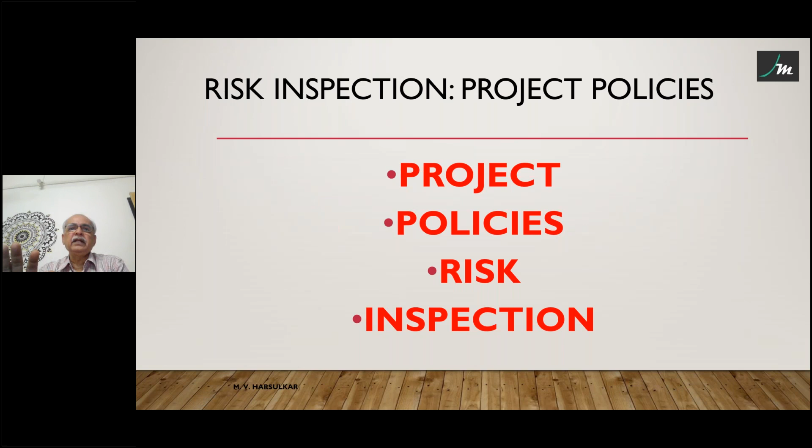So what is a project? We have to first understand what is a project. So normally what we understand by project as far as engineering insurance is concerned is whatever is under construction or erection. So it can be a civil work, it can be a machinery erection, it can be a combined civil and machinery erection, or it can be only a structural work like say transmission towers or mobile phone towers and all these things.

So in civil construction, you have different types of civil construction, residential buildings, commercial buildings, or airports, or infrastructure projects like harbors, railway lines, and airports. In machinery, it can be individual machinery like a DG set or compressor or boiler, or it can be a section of the main plant like coal handling plant, ash handling plant, water treatment plant, or the entire project, large projects like power plants, chemical plants, fertilizer plants. And structural work, it can be transmission line towers or mobile phone towers or windmills. So this is what we understand in project.

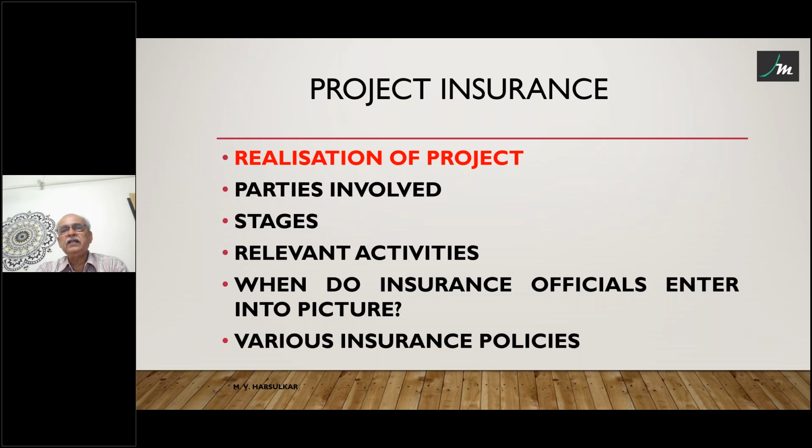Now let us first understand how the project is realized, who are the parties involved, what are the stages, relevant activities at each stage, when do insurance officials enter into the picture, and various insurance policies. As far as surveyors are concerned, we are concerned only after the insurance policy is issued. But if we understand this process, we will understand some of the issues we face when we go for survey and the policies have some lacunas. If you understand these stages, then you will understand why those things have come into picture in the policies. I will not go into much detail on this.

First is the objective, which is decided. Once the organization decides some objective, they do a feasibility study. In that, they will see how much market can be there, financial requirements, social, and all those things. After that feasibility study, if they decide to go for the particular project, erection or construction of a civil facility, at this stage the insurance agent or risk management consultant should come and advise them on proper insurance coverages during the project stage.

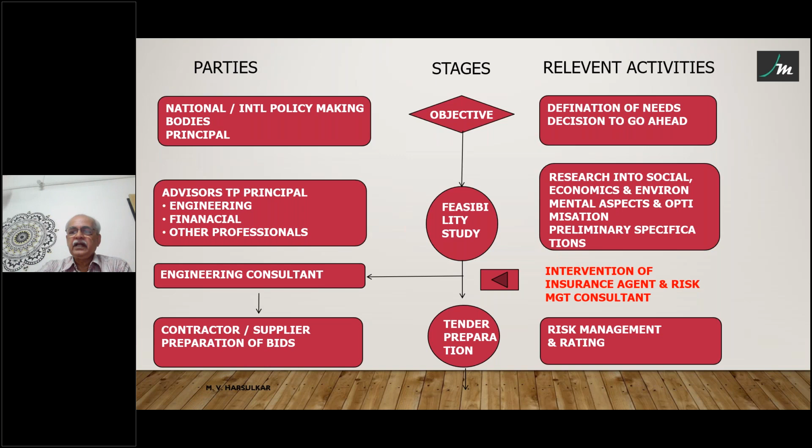Because in the tender, there is an insurance clause. If advice is given at this stage, that clause can be proper, and there will be no gaps in insurance. So once the tender is prepared, next will be the successful bid and work contract award. After that, the issuance of either a marine-cum-erection policy, or an erection all risk policy and marine policy separately, and other relevant policies for the project.

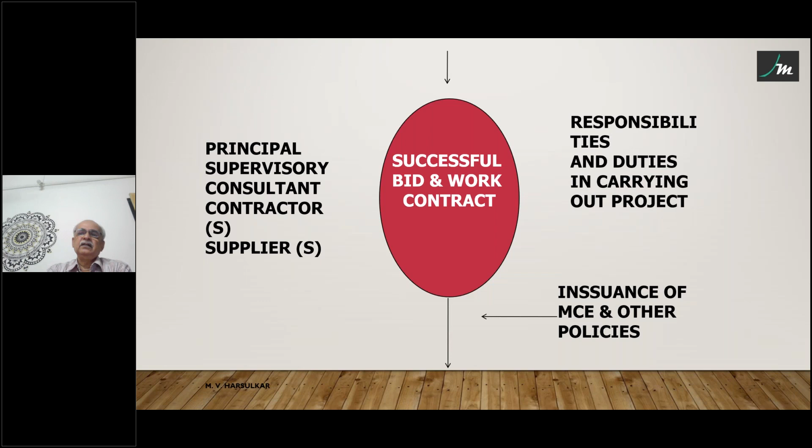And the project, actually now here our scope comes. Survey, you can get a survey at any of these stages. So generally, the first phase is site preparation, and simultaneously some material may be coming. So pre-erection or pre-construction storage of that material at the site.

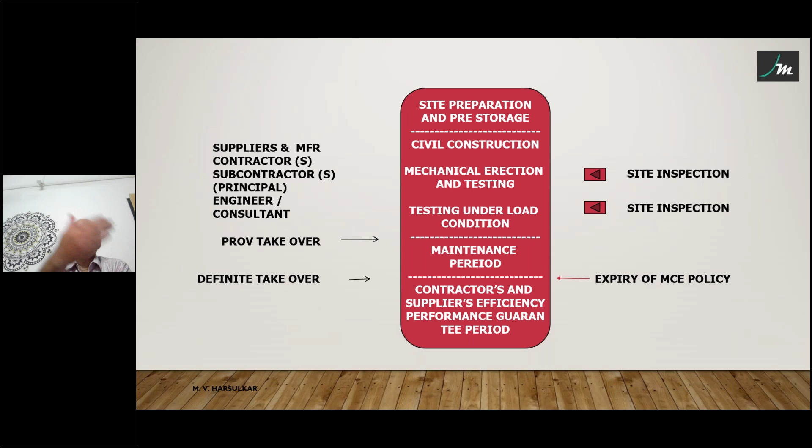Then normally the civil work will start first, because the plant and machinery which is to be installed in the buildings can be installed only when civil construction is ready. So when civil construction is ready, maybe partly, then simultaneously there may be mechanical erection and testing of plant and machinery. So in this testing, what we understand as a testing period is not this testing, it is the cold testing. And then once the machinery is erected, testing under load conditions will be done. That is what we understand as a testing period in project policies.

And then once that testing under load condition is done to the satisfaction of the principal, there is a provisional handover. Provisional handing over of the project. So at this stage, the erection policy, basic erection policy or CAR policy, is over. In CAR policy, there may not be testing involved if there is no plant and machinery.

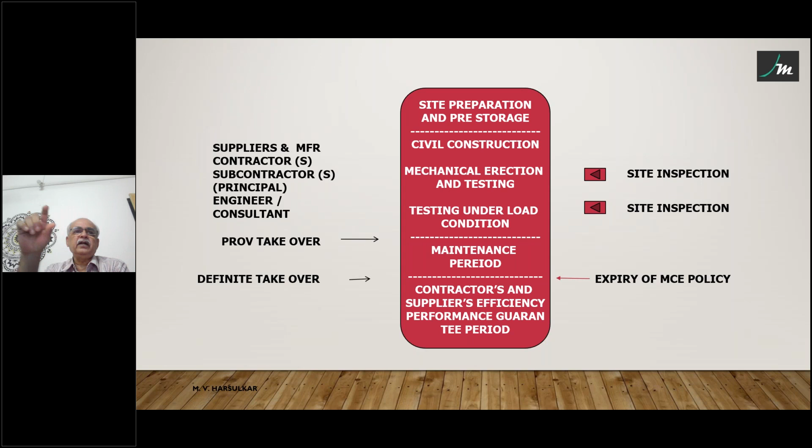So after that, the maintenance period comes, which is as per the defects liability period in the contract between principal and contractor. Whatever contract is there, in that there is a defect liability period. So according to that, this maintenance period is taken. Presently, there is a limit of 24 months for that, but earlier there used to be more. Even 5 years or 7 years maintenance periods had been given earlier.

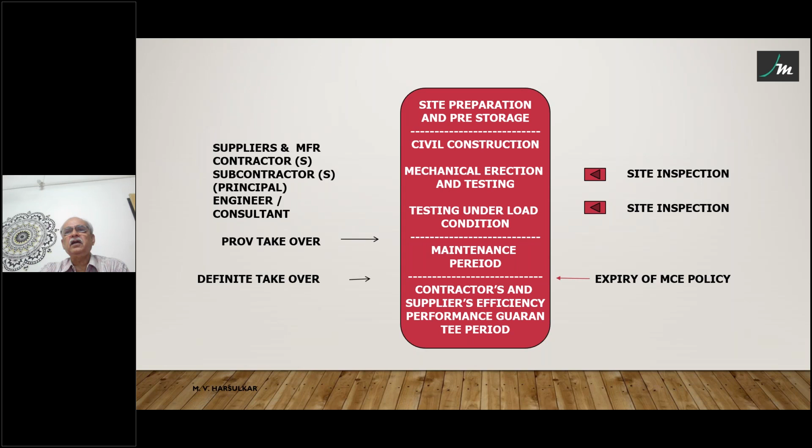Once the maintenance period is over, then it is called definite takeover. The erection policy expires at the time of provisional takeover except maintenance cover. So the insured is supposed to go for the operational phase policies when this provisional takeover is there. Now here I have shown site inspections during the construction erection phase. Earlier it used to be done. Now it may not be done in so many projects, but that was the earlier thing. It was very much there. We used to do these inspections.

Now these policies you are all aware of, I have just repeated. Erection all risk policy, contractors all risk policy, mega policy, advance loss of profit policy. These are the project related policies. Mega insurance is per IRDA, which has categorized risks into different categories. So a mega policy can be taken by any insured if his sum insured at one location exceeds 2,500 crore. The terms and conditions are not as per our TAC wording, they are as per the insured's requirement. So it is a tailor-made policy. Whatever the insured wants is referred to the international market, and quotes are obtained from the reinsurers. Based on those quotes and terms and conditions, the policy is issued.

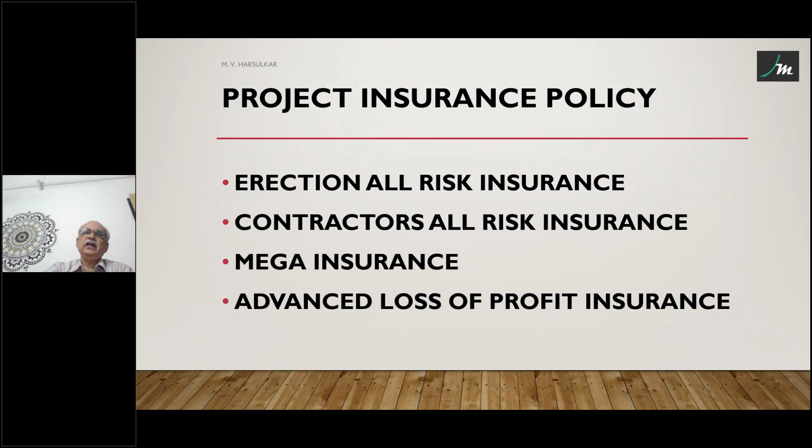Then advance loss of profit policy. The word advance itself says that you are not earning profit, but you would have earned the profit if the project completed timely, and because of losses during erection or maybe marine, the project is delayed. So in the delayed period, the insured may have earned some profit as per its projections. So that profit can be covered in this policy, advance loss of profit policy.

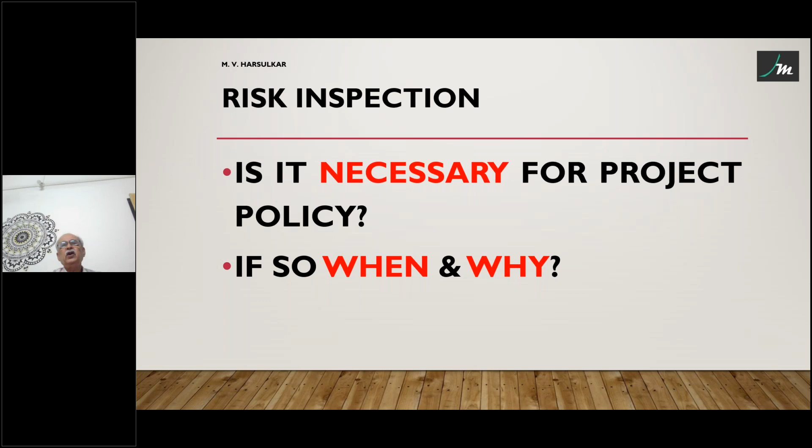Now, is it necessary for a project policy to have a risk inspection? Some of you may have done the pre-acceptance inspection, but there are other occasions also where risk inspection is done, maybe from the insurance company or maybe from the insured. So what are those? So first is called pre-acceptance inspection. Before the acceptance of a project, inspection is done. Normally such occasions are very rare because for most projects insurance is taken timely, but there are occasions where the project policy is taken late. Then the insurance company will say, since you have started the project, we would like to know whatever work you have completed, whether there are any damages and all these things.

And in Maharashtra particularly, the contractors for civil works delay taking insurance till their first running bill is not paid, because their contract says they have to take insurance. So they will come at that time, when the first running bill is pending. They will come and say, I want an urgent policy and all that. That time the insurance company says that we want to get this risk inspected. Then this mid-term inspection which I showed in the chart, those are also required.

And risk improvements. Sometimes, if there are a lot of losses in a particular project, the insurance company may say that this risk should be inspected and risk improvement measures can be suggested. And after a loss, as surveyors, we all are going; that inspection is from the assessment point of view. Insurance company officials also do inspection after loss.

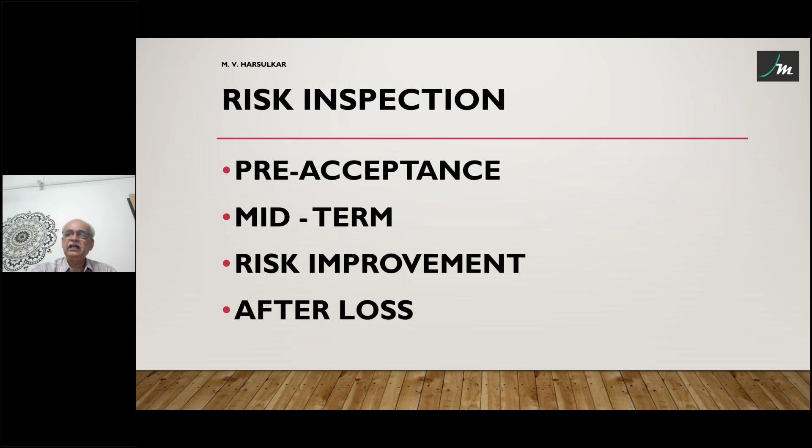So after loss, one is the surveyor going and insurance company officials going. The insurance company officials going after loss, their purpose is different: underwriting things and all other things. They don't do any assessment or anything. They will just see what kind of loss is there. Then for the reinsurance purpose and PML assessment.

Basically, the PML assessment is for reinsurance purpose only. Sometimes only PML is asked. Sometimes for a large project, if facultative reinsurance is required, the inspection is required, but each reinsurance company has their own formats. So they will say you have to give this information as per our format. PML assessment inspection is many times required when the reinsurance is to be done on PML basis.

And that PML basis reinsurance depends on the company's financial strength. A company like New India or United India or ICICI Lombard, their retention levels are high. So their PML assessment will be different. Whereas smaller new companies, their retention limits will be low. So they may have to go for higher reinsurance. In that case, they will require the PML assessment.

And these project monitoring inspections are basically for advance loss of profit policy. So the main purpose is to identify delays, and bifurcate the delays because of insured perils and because of uninsured things. So that is the main purpose for project monitoring risk inspections.

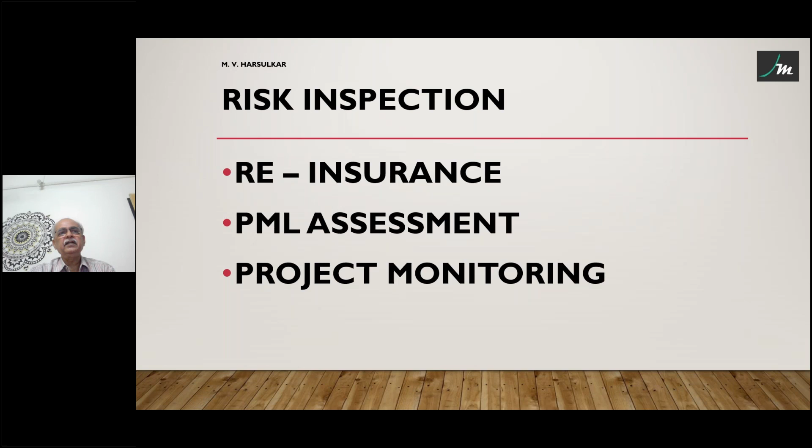Pre-acceptance risk inspection, what could be the situation? Some I have mentioned, there can be others also. The first is insurance after commencement of work, for which I already gave an example: CAR policy in Maharashtra particularly, where contractors delay the taking of insurance. The same thing can happen for erection policies. A number of times people have seen insureds coming for erection policies before start of testing. Till that time, they never thought of taking insurance. Only when testing was to be started, they approached for an EAR policy.

Then second is marine transit insurance with another insurer. This inspection used to be done earlier, but now I have not come across it. But some insurance companies may be doing it. This is to identify whether there were transit losses or not. Because transit losses, if they are there, will go to marine insurance.

And normally in projects, the consignments which reach the site are not opened the next day. They are stored just like that. And then only at the time of erection will they open the packing. At that time, they will find damage. So there will be a dispute whether this loss is because of a transit peril or it occurred during the storage period. So to avoid those disputes, this inspection may be done by the insurer. And for assessment of risk exposures and hazards, in some projects this type of inspection may be done.

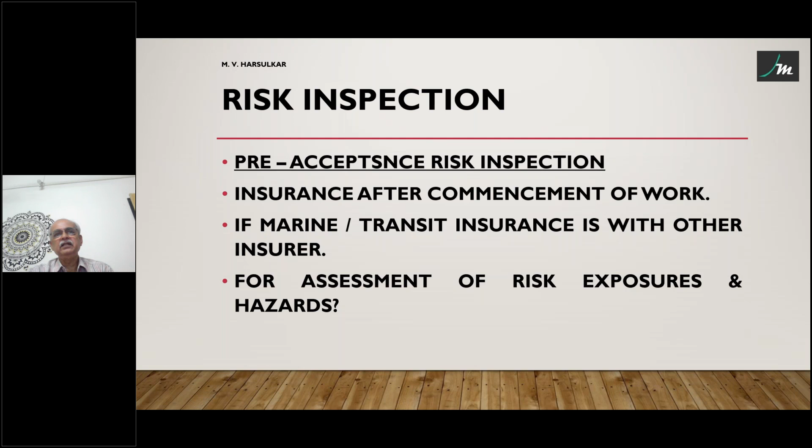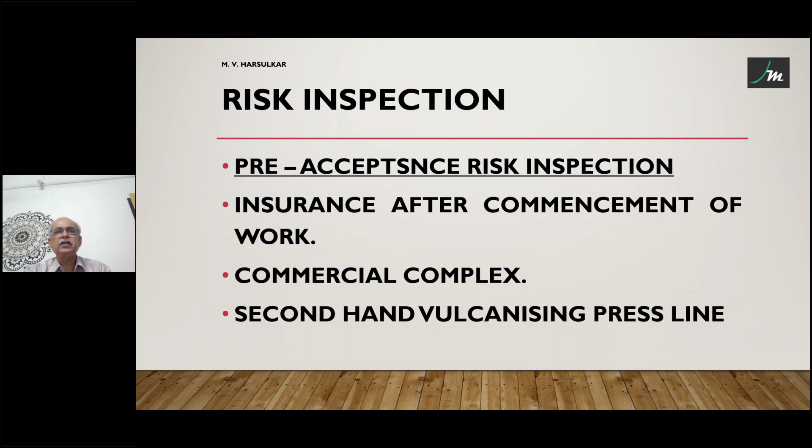Then insurance after commencement of work, two example photographs I am showing you. One is a commercial complex proposed risk inspection. Second is a second-hand vulcanizing press line. Just photographs, case studies, we'll discuss more about this. So at this stage, the contractor approaches for insurance. So this is one photograph.

On this side of the road, where these people are standing, is a national highway. And on this side, all these buildings are already there. There is only a gap of one road here, some 4-meter road. Now the TP risk is very much there. And this construction is going on.

The basement excavation work contract was with a different contractor. They are going to do only the civil structure. Even plumbing, electrical, everything is a different contractor. So that itself will be another issue for the underwriter of the plumbing and electrical work if those contractors take insurance. This contractor is going to do only the structure work.

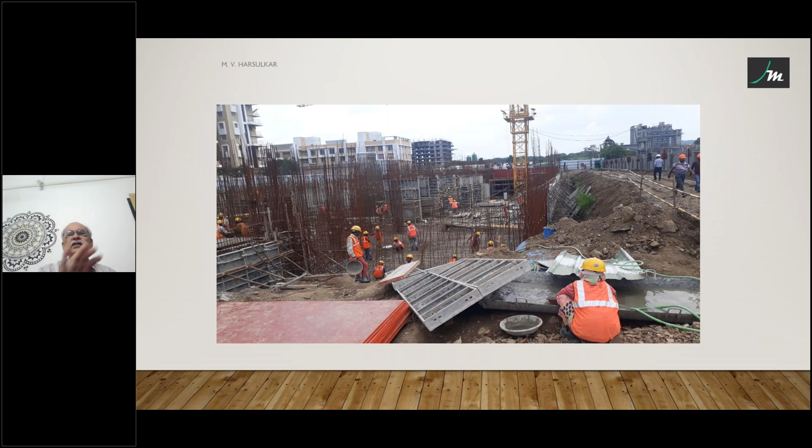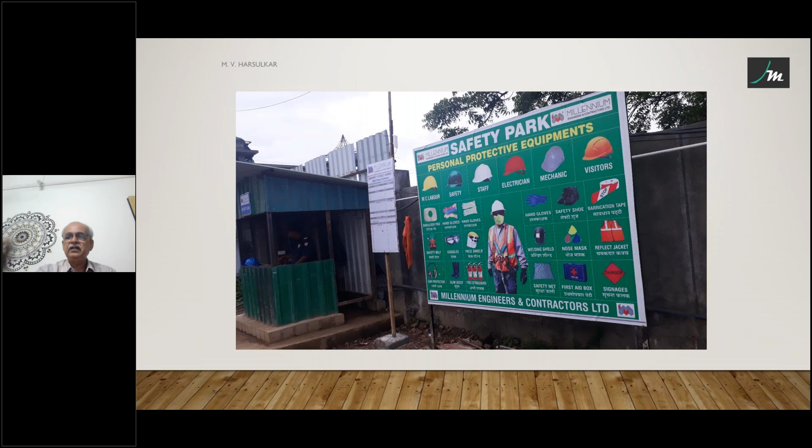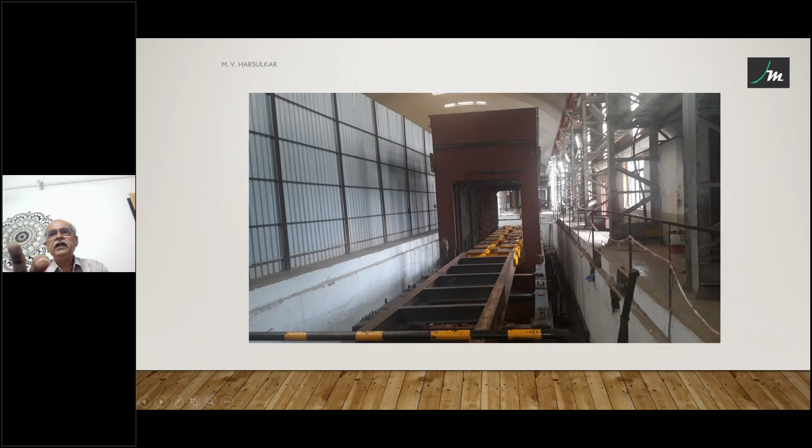So this is a back side photo. This was a front side photo. The other was a front side photo. So from the basement it is going to erect that press and all this.

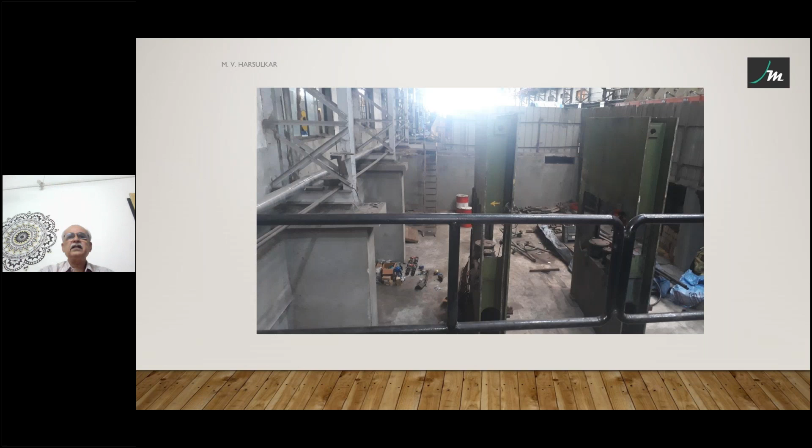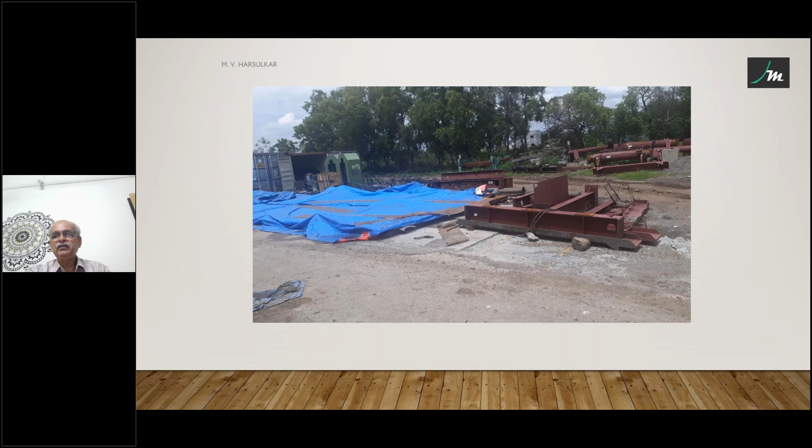Now some material was stored in the open. Somewhere tarpaulin is there, somewhere tarpaulin is not there. So if it is a monsoon season, you have to see whether such things are supposed to get damaged because of flood and inundation, depending on the precipitation in that area.

Then midterm inspection. As I showed in the earlier slide, for long policy periods, maybe 6 months or so, to know the work progress as per bar chart and whatever the risk involved. If there are delays, what could be the additional risk involved? And risk monitoring in case of advanced loss of profit policy. But for this inspection, normally the insurance company says it should be quarterly.

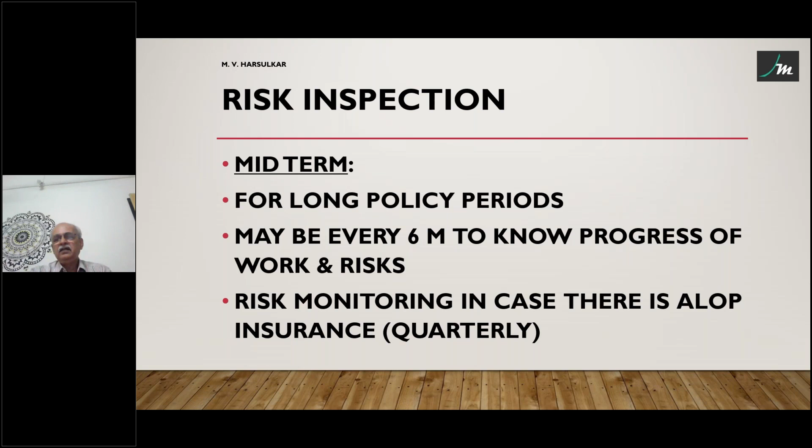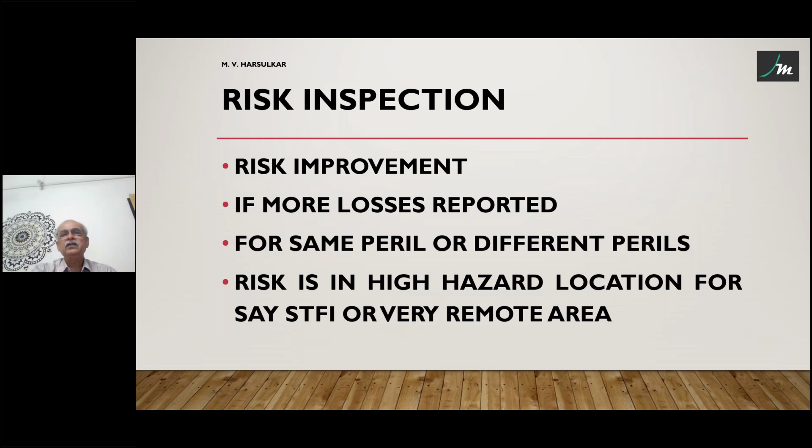And risk improvement. If more losses are reported for the same peril or different perils, or the risk is in a high hazard location, say STFI or a very remote area, maybe risk improvement measures, some inspection may be requested.

And after a loss, insurance companies have their own criteria for their people, but if there is going to be any admissible loss, any loss intimated, they have to appoint a surveyor. So they appoint a surveyor, and then the surveyor does what we are doing for project policies, that is after loss.

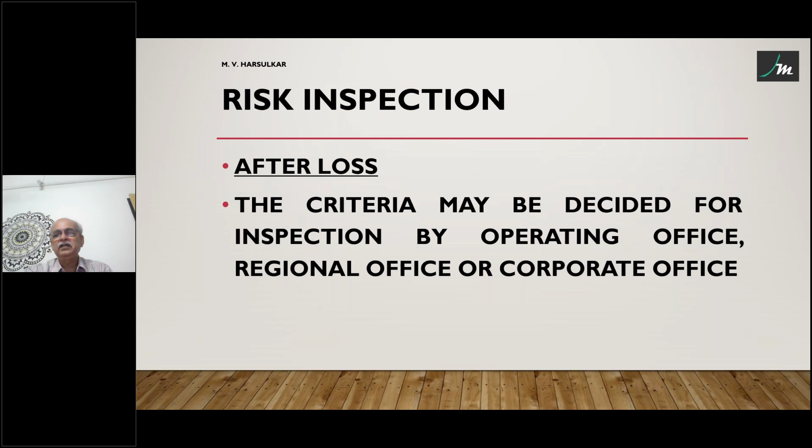Then reinsurance and PML. This inspection, maybe insurance company officials will do or surveyors will do for acceptance of risk by reinsurers. So these reports will go to the reinsurer. If they are not happy, they will ask for some clarification and all these things. And if the PML is not proper, they may say that your PML is not correct.

But normally, what I have seen is, whatever PML we are assessing, the major reinsurers, Swiss Re and Munich Re, have their own indication. For India, this is the minimum PML. Even if your working gives less PML, still they will say the PML for your risk is this much. In olden days, it used to be 20%. And now if you go to GIC Re, they are considering 33 1/3% as a PML for any risk. So even if I assess a PML of 15% for a project policy, for reinsurance purposes GIC will say no, it is 33 1/3%.

But still, the insurance company wants to know how much loss they can expect from such a project in case of any major eventuality. Then sometimes the reinsurer engineers also visit for a very large project. They also visit before acceptance, midterm, or after a major loss. They also come for inspection.

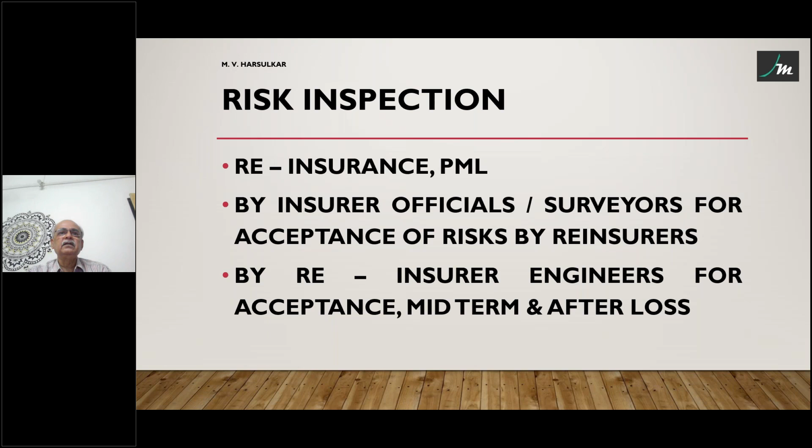And basically, why this risk inspection is involved is because when we underwrite anything, insurance companies earlier used to take a proposal form. Now, when it is placed through a broker, they may not be giving a proposal form. So they give what they call a request for quotation, RFQ. The proposal form had bare minimum information, and this RFQ does not have even 50% of that information. So insurance companies have very bare minimum information.

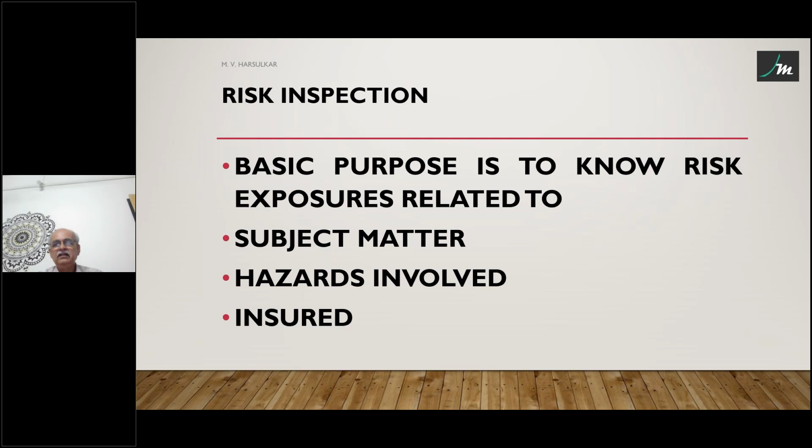So these are the things, but the basic thing. Then all the points, if you see, they are related to one of the things, whatever I will be telling you now. So that is about this thing.

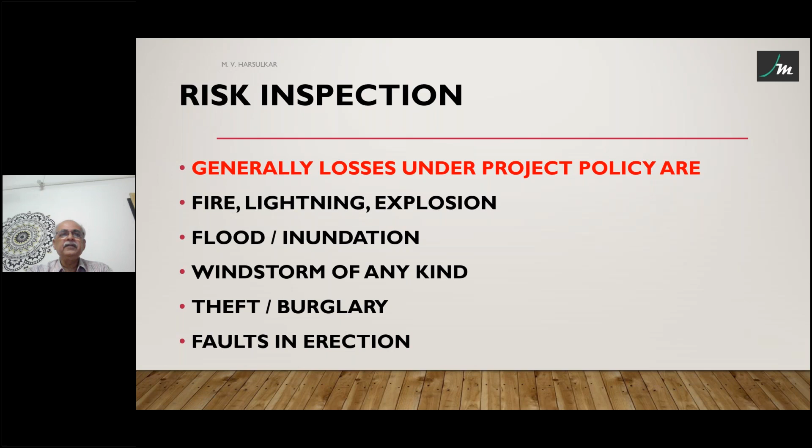So there is no question of wind speed and all these things for project policies. If there is a localized small storm and it is damaging the property under erection, yes, those losses also can be covered. And theft, burglary, faults in erection, lack of skill, lack of experience, malicious act; terrorism peril is an add-on cover. So if insured opted, then those losses also.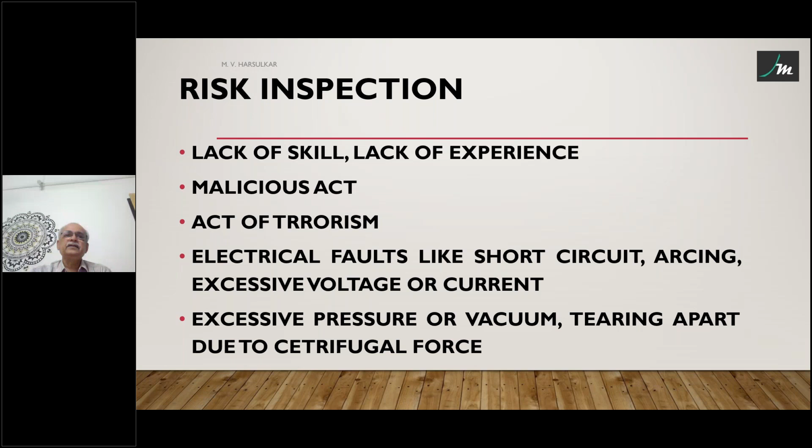Electrical faults, like short circuit, arcing, excessive voltage or current. This need not be during testing. You are using electrical work for welding and all, so many things you are using electrical equipment. So there also short circuit or arcing can cause damage to the stocks or some machinery which is erected. Then excessive pressure or vacuum, tearing apart due to centrifugal force, collapse, entry of foreign object, handling at site, various handling risks because of use of different construction plant machineries, earthquake, tsunami, testing risk.

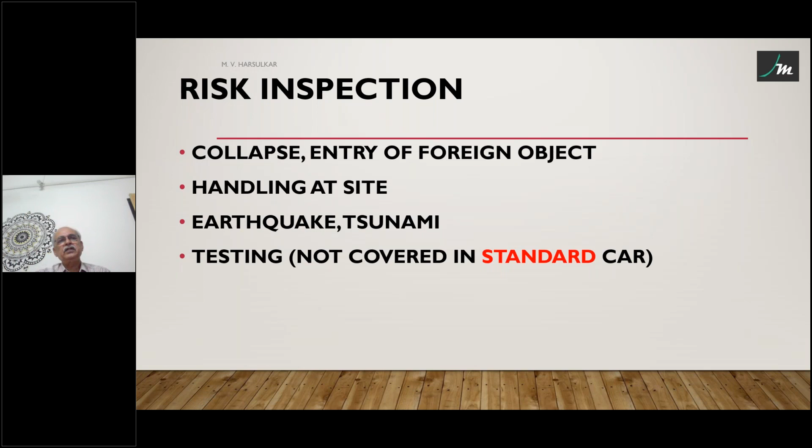This is not covered in the standard CAR policy, but if you go to the CAR policy tariff, it says that projects where the civil work value is more than 50%, CAR policy has to be given. So more than 50% means it can be 70%. So the balance 30% is what? It can be plant and machinery. So for that plant and machinery, the insured has to inform the insurance company before taking the policy, and the insurance company agrees to cover the testing risk by payment of additional premium. So if that is there, additional machinery and testing risk is covered, and testing may be there in CAR policy also. That is why I'm using the words not in standard CAR policy, but it can be there in CAR policy.

Then risk inspection. So what we have to see is location related risk. Some of the location related risks can be flood, inundation, or storm. If it is very near to a coastal area, storm tempest. If it is in an earthquake zone, earthquake risk. If it is a very congested area, like metro work and all these things, maybe third party claims will be more. If it is road construction in a flood prone area, then with the flood risk, kilometers length of road can be washed away.

Then human related, that is errors they are doing. And handling risk: large material handling is there at the project site. So during handling, what kind of things are they doing? Whether they are following proper procedures of maintenance of CPM, whether those people are trained in operating those machines, instructions to them and all those things, handling risk.

And plant and project related. A thermal power plant may have different types of losses compared to a chemical plant or fertilizer plant. So plant related risk. If it is a steel plant, there can be different risks in that. So plant and project related risk, and natural hazards, that is AOG perils risk.

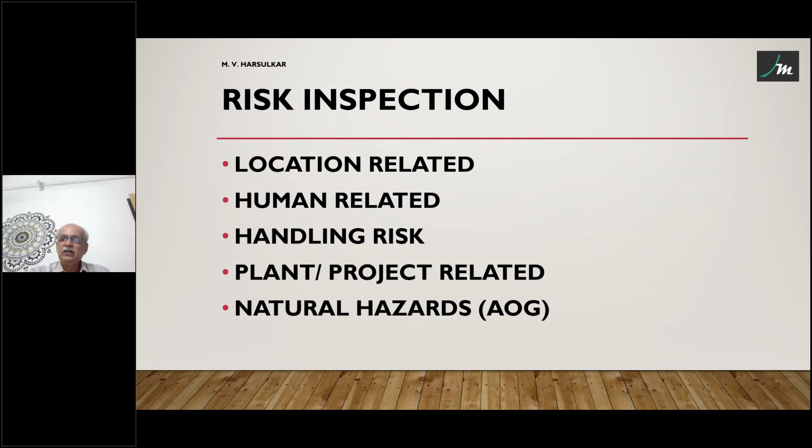So these are some guidelines which could be followed by some company. Each company may have their own thing. Just for understanding, I have said midterm inspections. This could be the guidelines. Risk with sum insured above 500 crore to be inspected during currency of policy and just before commencement. So it may be done by their insurance company engineers, or surveyors may be asked. So if we are asked, we have to go and inspect the risk and give the report based on whatever is the position there.

And proposals received either after arrival of first consignment at the site or commencement of construction should be inspected before acceptance of risk. This is their pre-acceptance survey. Most of the insurance companies follow this. And second-hand machinery should be accepted only with the chartered engineer's report. Now if the second-hand machinery is purchased in India, they will require the chartered engineer's report. So those of you who are chartered engineers, you can have this option also for inspection.

So basically in this report, the insurance company wants three things: remaining useful life, whether the purchase cost is reasonable or not, and value of similar machinery if purchased new. These three things are basic things. Then the machinery should be inspected in working condition, and condition of machinery. So these are the things which are required in this report. Those of you who are chartered engineers, you can do.

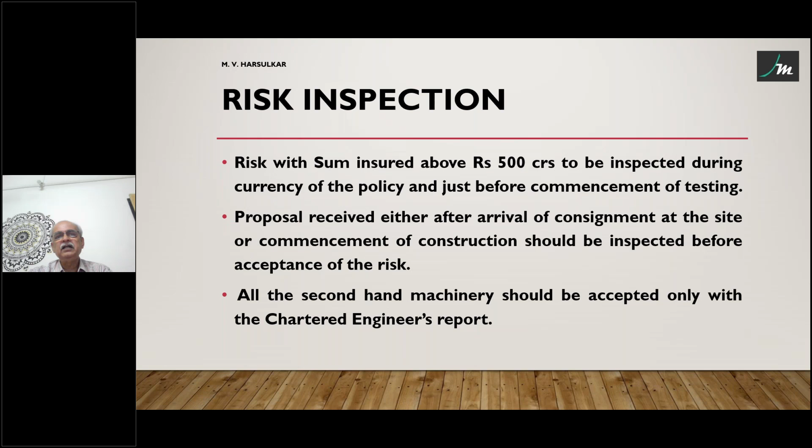Then proposal for expansion, modernization projects for existing plant. So expansion project, because it will be in the same premises, connecting this with the second-hand vulcanizing line photographs which I showed. There are already 3 lines, and this is the 4th line they were installing. So the risk from the neighboring machines to this machine, or from this machine to existing neighboring machines, whether there are any interconnections. All these aspects should be coming in this report. Then petrochemical, fertilizer, power plant equipment may be inspected during currency of policy period.

Then risk with gap in payment of installment premium and policy extensions. As you are aware, in the erection all risk policy, CAR policy, if the policy period is more than 12 months, the insurance companies offer premium payment in installments. Otherwise, as per 64 VB, 100% premium is supposed to be collected before the commencement of policy. That is applicable for policies which are 12 months. The insurance rules give this provision that the installment facility can be given. There are 2 exceptions given as examples. One is this project policy, second is hull insurance, or some other insurances. So there the installment facility can be granted.

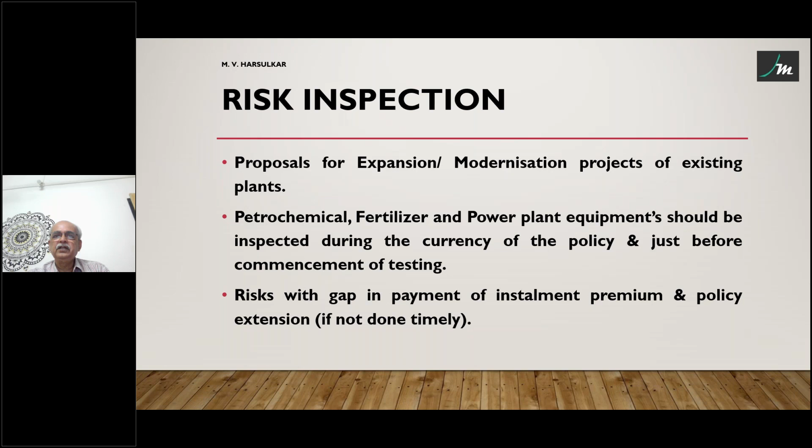The second thing mentioned was if there is any major loss during the currency of the policy, and suppose the total premium payable was 20 lakhs, and one major loss of 30 lakhs occurs, and till that time the insured had paid only 2 installments, that is 5 lakhs, then the balance premium has to be paid immediately by the insured. There are some other conditions also. I do not know whether other companies attach these endorsements, but that is very important if you are doing inspections for a gap in insurance, installment premium or policy extension.

And proposals for refurbishment, upgradation or extension of existing civil works. Now there are so many road projects where this insurance is given. An existing 2-lane highway is being made a 4-lane highway, and the existing road is only upgraded to the standard required, state highway to national highway, with the extension on both sides as per the new work. Now the problem is whether they have included the existing road value in the proposal. If not, damage to new work is no problem, but whether loss to the existing part which is not redone will be payable or not.

Because when there is a flash flood, even the road work done earlier will get washed away. For the new work, yes, you are going to pay fully. But for the existing road, whether that cost is involved or not? How do you know whether the work is done only for part of the road or the full road? During inspection you have to ask him what refurbishment he is going to do and at which places. This information is available with them.

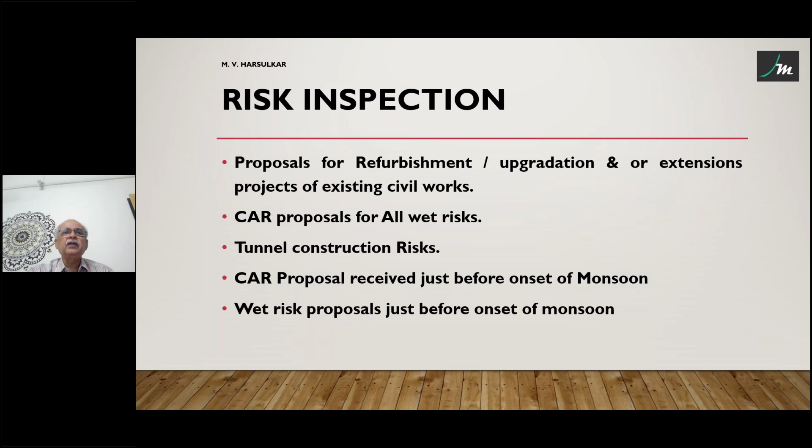The insurance company, when the proposal is there, sometimes gets only the level 1 bar chart, which shows only major portions of the project and their start time and end time. Level 2 shows the bifurcation into sections. Suppose a building is there, then construction will be like excavation, then piling and so on. Then pillars, floors, RCC floors, roof, wall work and all these things. These will be the phases mentioned, with the start date and end date for each activity.

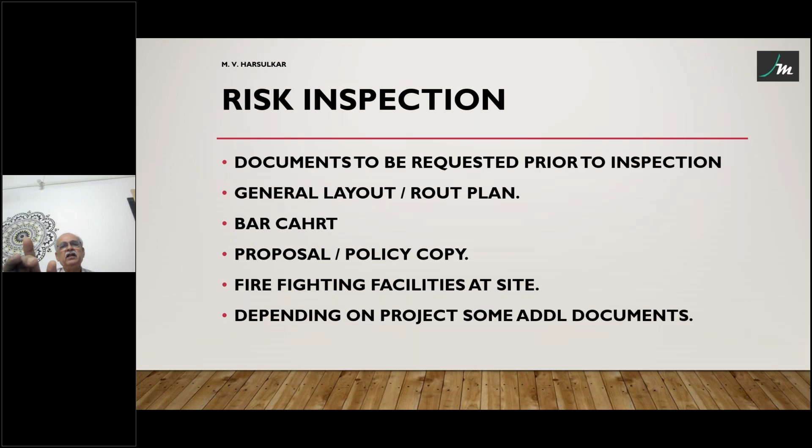So these are the points for inspection. The first points are just general: date of inspection, name of inspecting person, names of insured officials contacted. You first go to the finance person in charge, and further the technical people. You have to give all names, but most important is the person who is giving you information. His name should be mentioned there, so tomorrow they can't say we never told you this. All those names should be mentioned with their designation and contact numbers. And purpose of visit, whether it's pre-acceptance, midterm, an inspection for delay extension, or delayed payment of installment premium.

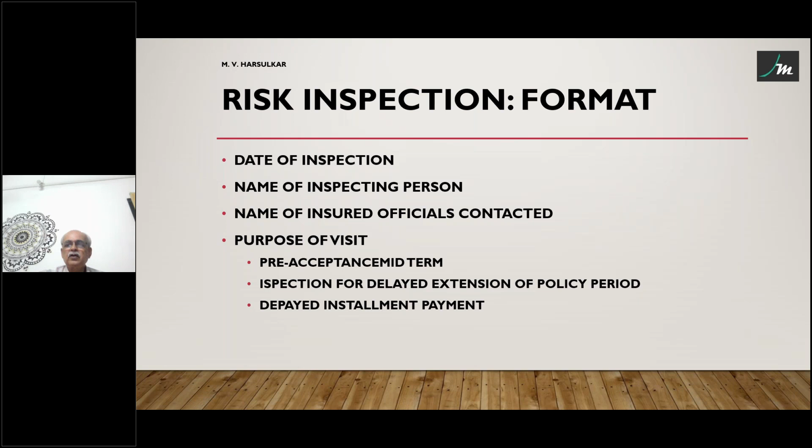Then insured details like site address, telephone numbers, name of the person present during inspection, his designation and all these things. Any certification like ISO, if they have it, means they are following certain procedures. When ISO or other certification is there, that means some minimum standard is maintained by them.

Then nearest railway station from site, approach road to the site if it is in a remote area. This is important from a marine point of view. Then details of plant and machinery to be erected: major machinery, or blockwise machinery, depending on the project. Name of the project as a whole, whether the insured is insuring the entire project or part of the project. If part of the project, which section of the project.

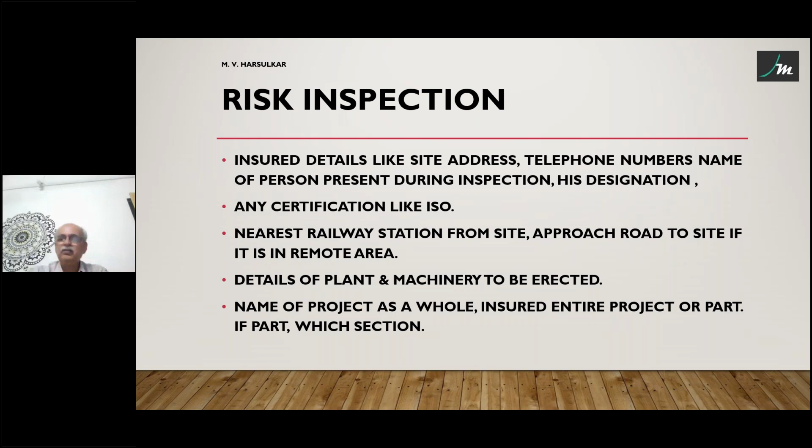Then whether it is an extension or expansion of an existing facility, refurbishment of an existing plant at the same location, or brought from another location. Like I told you, the second-hand imported vulcanizing plant, but they did refurbishment to suit their requirement here. So same thing: in case of an old plant, any refurbishment done.

Risk exposures from and to nearby plants. To know the location risk, are there any hazards from this plant to nearby plants, or from the nearby plants to this plant? Two major things can be fire and explosion. The third one can be STFI. If the natural water flow is blocked and you don't have proper water drains, there can be flood loss also.

If it is a greenfield project, far in the interior, many other aspects come into picture: how the material is going to come, theft and burglary risk and all those things. Whether the compound wall was constructed before your visit or before start of work, because theft and burglary losses are covered in this policy. Second, if a compound wall is there, at least some reduction in flood or inundation loss can be there.

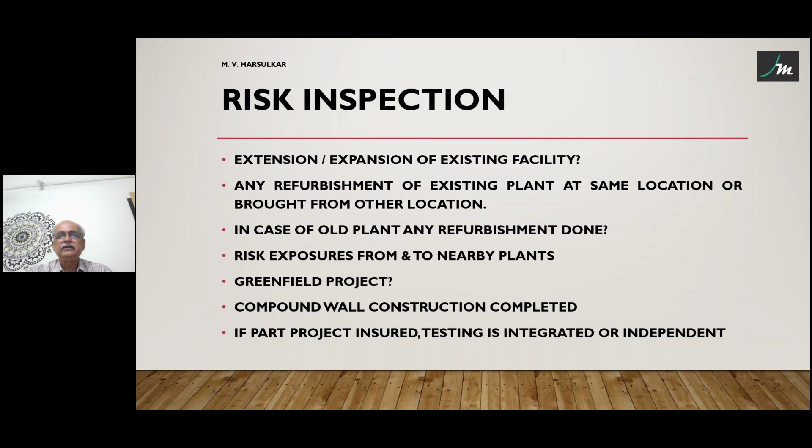And detailed status of project erection in case of midterm inspection or gap in insurance cases. Progress in relation to the original bar chart is to be given in detail for each block, section or machine; for each activity in the bar chart, you will have to give the completion details and any losses from that.

Details of contractors working at site with their scope of work, their experience, and subcontractors again with their experience, and whether they are part of this insurance policy or have taken a separate policy.

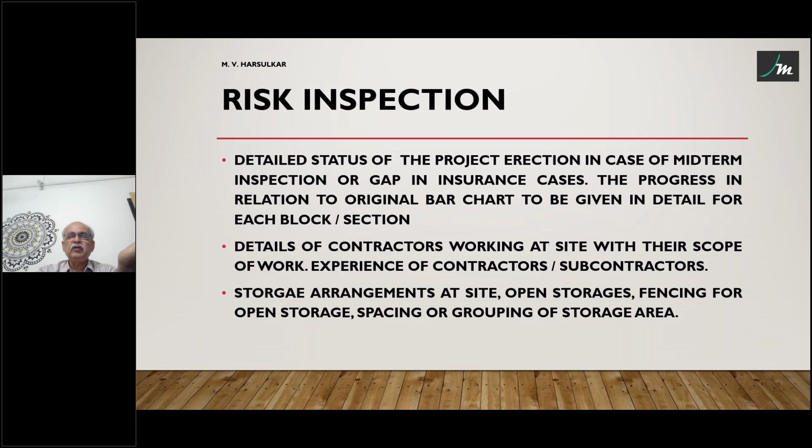And storage arrangement at site, open storages, fencing for open storages, spacing or grouping of storage areas. This is required because the firefighting facilities endorsement specifies certain norms for this. So take the layout details, to see what kind of storage they are going to do. And highest value of one storage area: if storage areas are bifurcated, what is the highest value of one single area? Because that is again required in the firefighting facility endorsement.

And what are the firefighting facilities? Most of the time you will find only portable extinguishers, but as per the firefighting facility endorsement norms, a lot of things are required to be there. Then access control system for the storage area. Whether anybody can come and take whatever he wants, or there is a system: entry, exit, issue of material, recording of that, and housekeeping in the storage area.

That plays a very important role because huge fire losses have been paid by insurance companies in storage areas. So how is the housekeeping in the storage area? Whether they are removing grass or not. Whether haphazard storage is there, or planned storage.

In closed storage areas, that is warehouses, if they are there: construction of the warehouse, access control system, inventory control system, security arrangements, spacing of storage areas, highest value in one storage area. So for both open storages and closed storages, these details will have to be noted down.

Then storage arrangements for electronic items. The most important, because so many electronic items, if they are not stored properly, when they are erected and testing starts, those equipments are found to be damaged. So storage arrangement for electronic items.

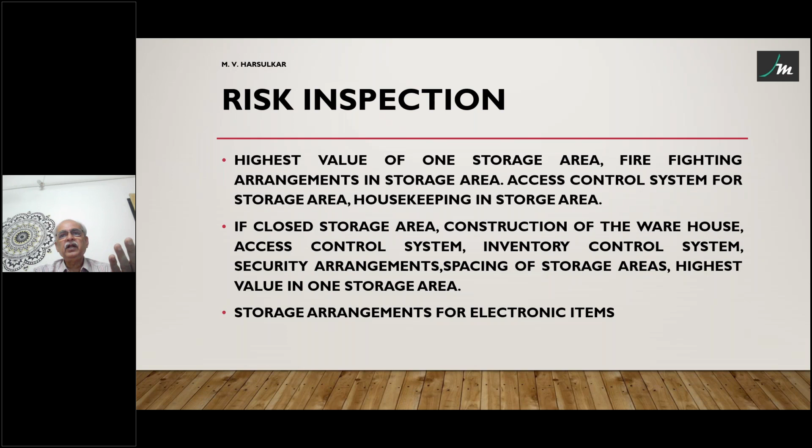Then material receipt procedure, how the material is received, whether it is entered the same day or after 1 week. Then what is the system for them to know whether the material received is not damaged in transit? What system they are following?

Storing of packing material. So after packing material is removed, where are they storing it? And erection waste, a lot of erection waste will be there, where are they storing that? And disposal of this packing material and erection waste, how is disposal going to be done? Because if it is stored in the same area as project material, it is a fire hazard, if you take it that way.

And construction erection staff, number of employees, whether employed by the principal or on contract basis. If a contractor has taken the policy, is it a regular employee of the contractor or on daily contract basis? And their experience. Those main erection people, not individual workers, but senior people. Name and educational qualification of the engineer in charge and his experience.

Type of erection contract. There are different types of contracts. Whether it is a turnkey contract, whether it is a build, operate, transfer contract, that is BOT contract, build, own, operate, transfer. There are so many other types of contracts. What type of contract is there? Because in turnkey contracts, you may not get BOQ values. It is a total overall contract. You may not get the BOQ values in case of claims.

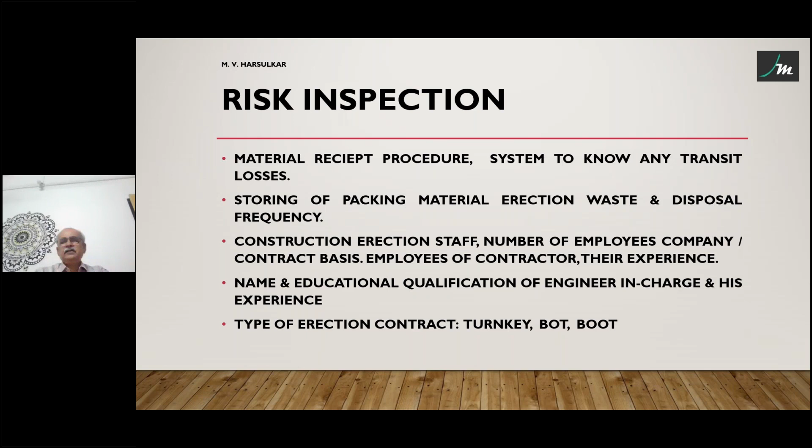System of maintaining logbooks. Frequency of data entry. Backup of data system. So whatever data you are entering at the site, what kind of backup system is there? Whether data is simultaneously going to their corporate office and maintained there, or it is going after maybe a 24 hour gap or 1 week. So that is the frequency of backup. If they are not maintaining logbooks properly, there can be certain issues in case of claims. So we have to see what is the gap period.

Then project monitoring system. Most of the major companies have some project monitoring software and they are entering data there daily. That system automatically updates your bar chart. That is why we are concerned with the original bar chart. If it is a LOP inspection, this project monitoring system will give you project delays and the reasons. But they should give those data to you. The original bar chart should be given to you.

And the project monitoring system and updating data in it with reference to the bar chart, whether there is any time lag, whether they are doing it daily or weekly, that again makes a difference, because if there is a loss and the last data entry was 1 week back, 5 days back, what work was done in those 5 days is not there. They will give you their own work completion, so there can be issues. So as inspecting engineers, we should get this detail. Whatever system is there, we should report. If there are any flaws in that, we can tell them that this can be improved.

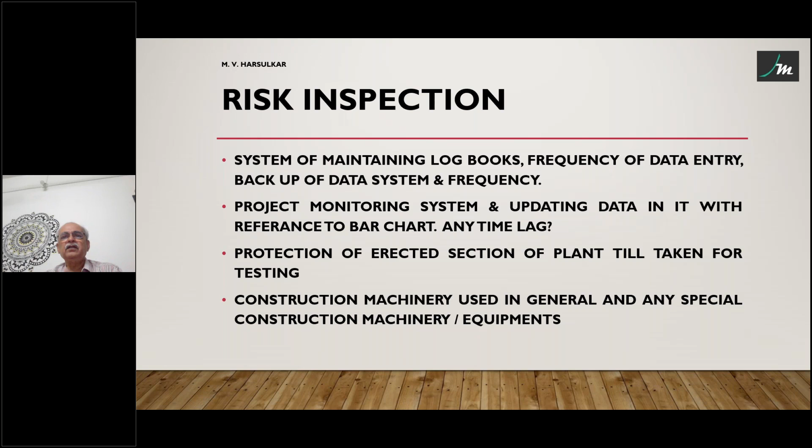And construction machinery used in general, and any special construction machinery or equipment they are going to use. Those themselves will have some hazards involved. So we can get those details.

And security arrangement, whether in-house or external. So again, how many security guards are there? How many checkpoints are there? How many security officers are there? And security post locations along the circumference, storage areas and project site. So all these details will help us in knowing the proper security at that time.

Portable fire extinguishers, locations, display, and hot and cold work permit system. This is very important at a project site. Hot work permit is for welding, gas cutting and all these things. Cold work is related to the air conditioning system or air handling units.

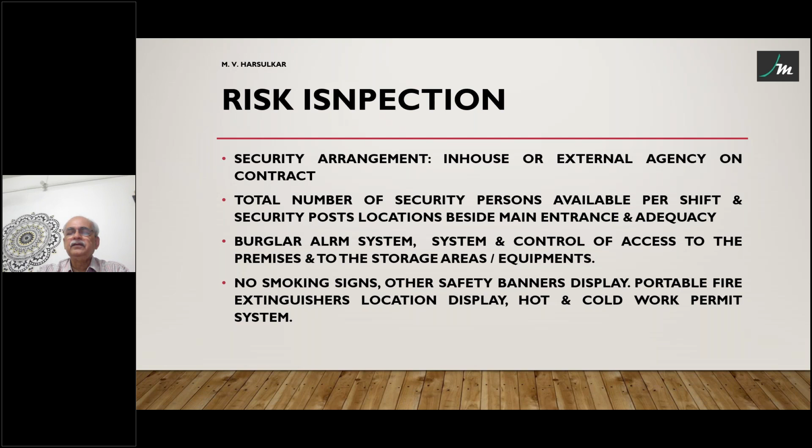Then, communication facilities available at site. This problem may not be there in most areas, but in remote areas maybe connectivity issues are there. Otherwise, in most places this will be available. But we have to ask that, and there should be a display of telephone numbers of police, nearest fire brigade, and main officials of the insured at the site and the office, at various places on the site, so that in case of any issue in that area, they can contact the person directly.

And firefighting facilities at site or nearby. So at sites, as I told you, very rarely have I found firefighting means like a hydrant system or any other system other than portable extinguishers. Except where an existing plant is there, they may have some hydrant system and all that. But otherwise, is anything nearby? Suppose the project is in an industrial area. So some nearby company may be having fire tenders and all that. So what is the nearest thing, public or private? If a firefighting system is there, then its details, its adequacy, and training of employees for firefighting.

So here, for adequacy, earlier we used to go to the TAC manual for fire hydrant systems, or different manuals were available as per that adequacy. But now what I find is that for fire hydrant systems the norms are different. They don't follow the TAC manual. Even the TAC manual has not been updated for the last 20 years. But that was a good guide. Depending on light hazard, medium hazard or high hazard risk, the requirements were there. So we can follow that if it is required. Otherwise, we have to give only the details of what firefighting hydrant system or other system is available there.

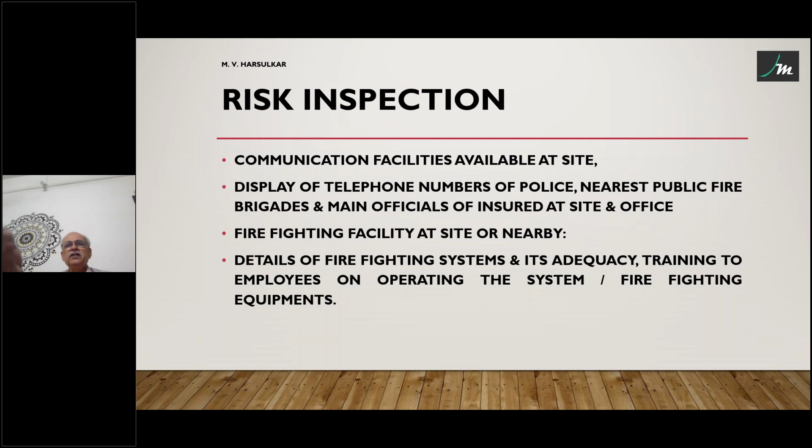So the nearest firefighting facility, its distance, whether there are any railway crossings, traffic conditions from the fire brigade to the site. The purpose of this is to know how fast the fire engine can reach the site. If there is a railway crossing and at the time of fire a train is going to pass, that crossing is closed for 5 minutes. 5 minutes is too long a time for fire to spread. So fire can spread to any level.

So protection against the STFI group of perils, open storages which can be damaged because of these STFI perils, and equipment in the open. Details of power supply at site: what power supply is available at the site, whether from the state electricity board or DG sets. Because the power requirement of the site should be known, since some risk can come from that area also.

Past losses for AOG perils at the location, not necessarily during their period, because this location has been there. So past losses, whether there is any hazard of flood, storm or earthquake damage in that area. Maintenance of loss records and a system for analyzing losses during the project period. Topography of the site: whether it is a flat site, or on some side it is at a higher level and some side at a lower level compared to the surroundings. What is the position of the site relative to the surrounding area? This will give you an idea about the flood inundation risk.

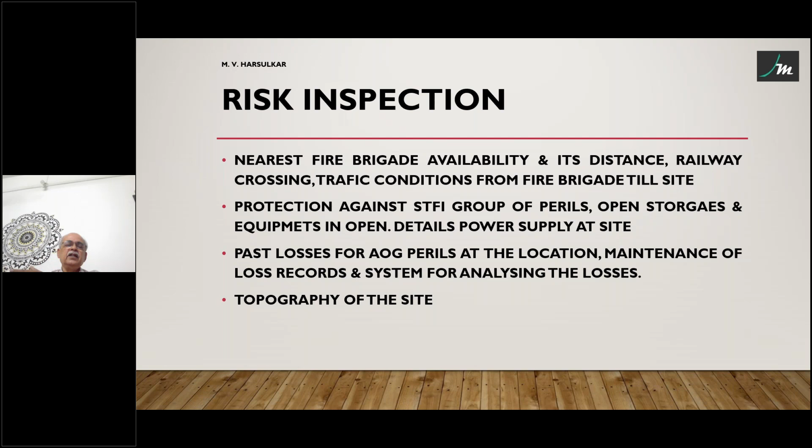Or even in case of fire, if the fire location is on one side and your normal storage is on the other side, and the wind is moving from the fire side toward the storage area, the fire can spread to the storage area.

Geological conditions and drainage system at site. Whether flood water drains or normal drains are provided in advance. If not, then again this issue of flood loss can arise. And whether at the project site they have blocked any natural flow, because natural water flow may have been blocked if the project is near a hilly area.

And if there is a flash heavy rainfall, even if a compound wall is constructed, the water flow force can break the compound wall and water can enter. So if they have blocked it, how have they diverted the water so that it does not come to the site? Only a compound wall may not be sufficient. So what precaution have they taken? There is even a warranty in the policy on safety measures which says exactly this: they have to take care of the last 10 years' rainfall precipitation in that area in designing the plant.

Then marine insurance details. If it is a marine-cum-erection policy, no issue. If marine insurance is with another company, suppose it is imported equipment, normally the CIF insurance is available only up to the port of discharge. So from port of discharge to site, whether the insured is covering this or not, because again the losses of marine and erection come into picture. There may be a 50-50 clause in the policy, but a 50-50 clause only in the erection policy is of no use if the marine insurance doesn't have it. Then they will pressurize to pay 100% of the loss in the erection policy.

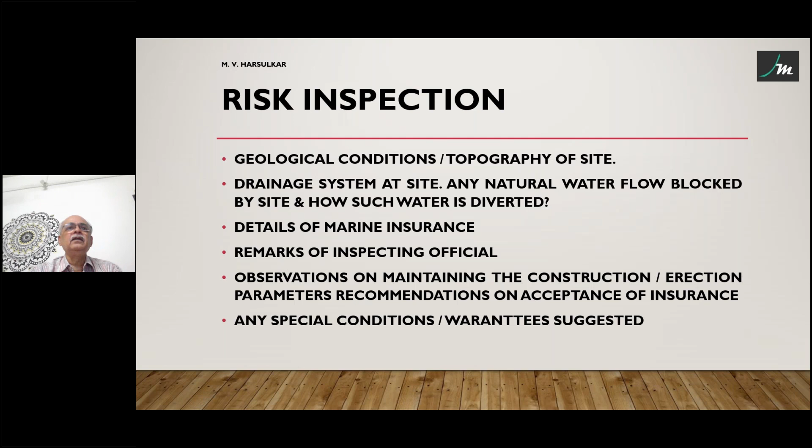If the insured has not requested some add-on cover which can be recommended, we can recommend that this add-on cover may be taken by the insured. It is not necessary that there should only be restrictions. You can very well recommend risk improvement measures. The insured will benefit if that add-on cover is taken. You can recommend it; whether the insured will take it or not is a different issue. And loss minimization suggestions.

Whether there are any prototype machines in the project material, because for prototype machines the insurance company may not grant testing cover. And equipment below ground level, if some equipment is going to be constructed in that area. Any selection against insurer. Now this is a very important point to be understood. What is selection against insurer?

Although the policy says that the contract has to be insured, the insured may take insurance only for the loss-prone sections of the contract. In one case I had seen, he was awarded construction of a road of about 50 kilometers, with 2 major bridges on the river. Instead of insuring the 50-kilometer road, he insured only the bridges. This is selection against insurer. Whatever the scope of his contract, he is supposed to take at least that bare minimum. Add-on things depend, like refurbishment, as I told you, but he cannot have selection against insurer.

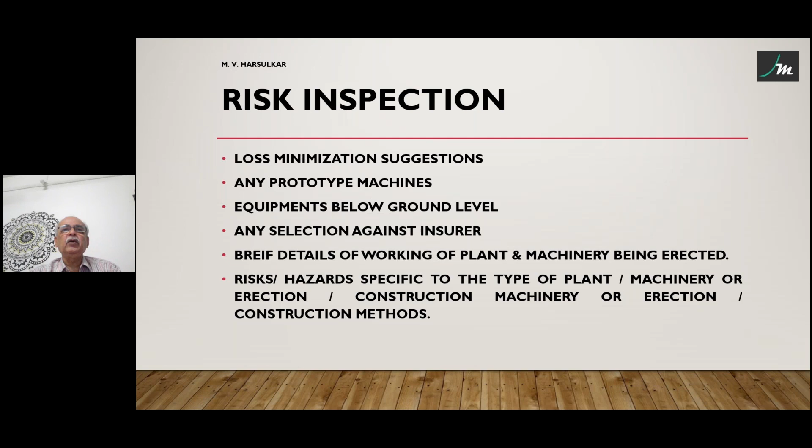And when I went there for inspection, I found that this is the third contractor who is coming there. Earlier 2 contractors were there, but they did some work and then that project was stalled. Now also, after a gap of almost 2 years, a third contractor was appointed and he was constructing the balance work. So this is the issue. We have to see why it was not available. Here the reason was something different. So that was the problem.

Then I mentioned whatever work was there, and for such a thing, I recommended don't give extended maintenance cover for the work which is already completed. Because in 2009 some work is already completed, and now the policy is there for two years from 2016. Why should I give maintenance cover for that? And like that, some other suggestions and recommendations I made in that.

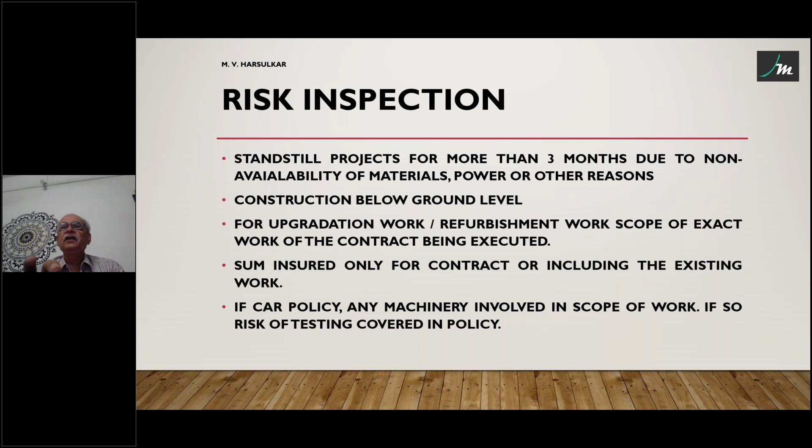Sir, there is a gap in insurance due to COVID-19. What about the inspection of consignment equipment received and lying but which could not be opened for checking at the time of risk inspection? Reason: it should be opened only at the time of installation as per OEM. Basically, as I told you, the consignments are opened at the time of erection only. So that problem, whether COVID is there or not, is very much there.

When the consignment came to the site, they should have got it inspected to know the transit losses. Whether COVID was there or not, most of the time the consignments are opened only when the erection is to start. When the consignment had come, they should have opened the packages and seen whether there are any damages. They can again pack and store it properly, but that is not done in so many projects. So this issue is very common in other projects also.

Then, if it is a transit loss, you say that it is a transit loss. If it is a storage loss, it is a storage loss. There is a lot of misunderstanding on the cessation of work issue. Only if the cessation of work has caused the loss can that exclusion be used. If the loss is because of something else, then you can't say that. Suppose because of COVID the factory was closed and there was a flood. How can you say that this loss is not payable? It is very much a payable flood loss.